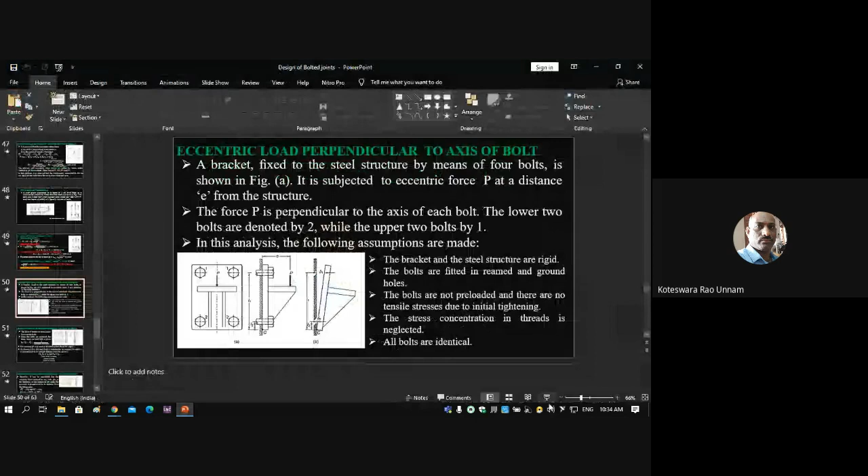In the previous class, we saw a bolted joint subjected to eccentric loading, which creates primary and secondary shear stresses. Today we see a bolted joint again subjected to eccentric load, but now that eccentric load will create a direct shear stress and a bending moment. So how do we analyze this type of loading? That's what we'll see now.

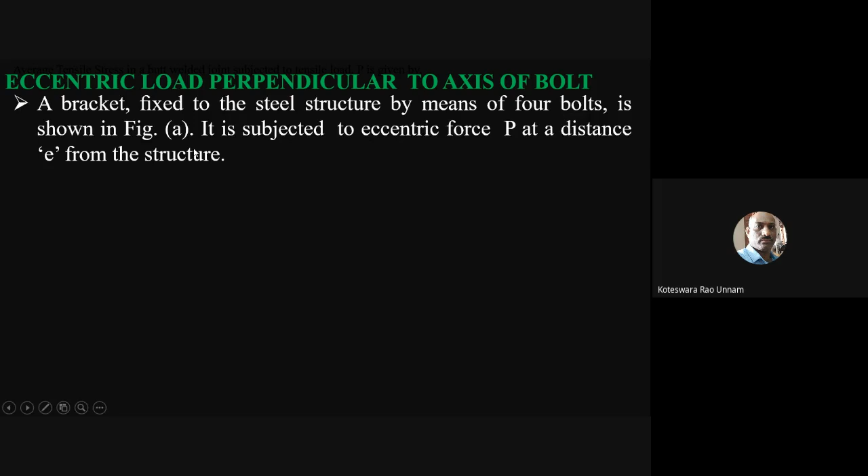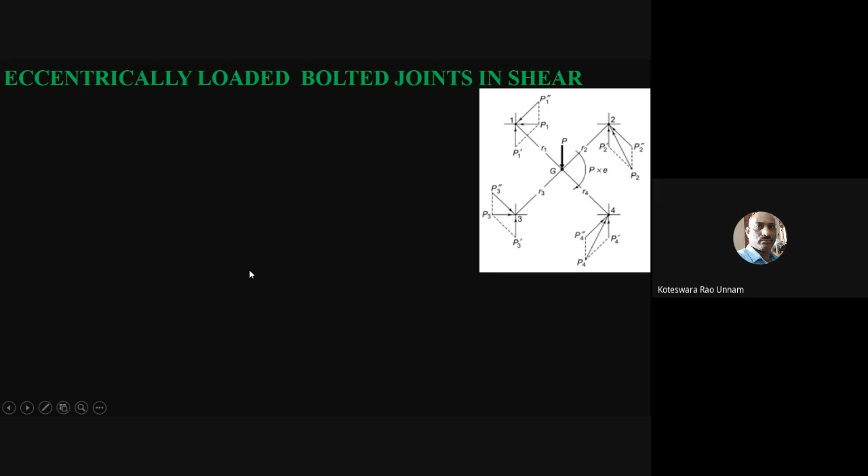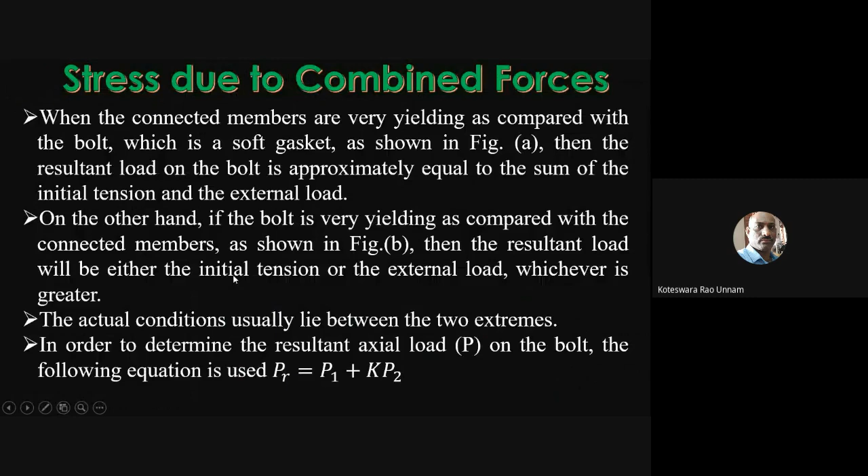Here I have a bracket. Notice the load is not in the plane of the bracket here, whereas earlier it was in the plane of the bracket. If you look at the numerical problems we discussed, taking this figure, here it is in the plane of the joint.

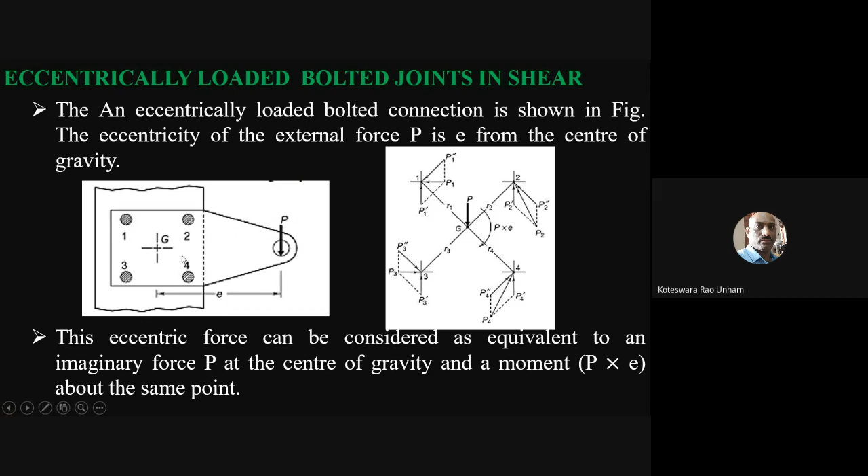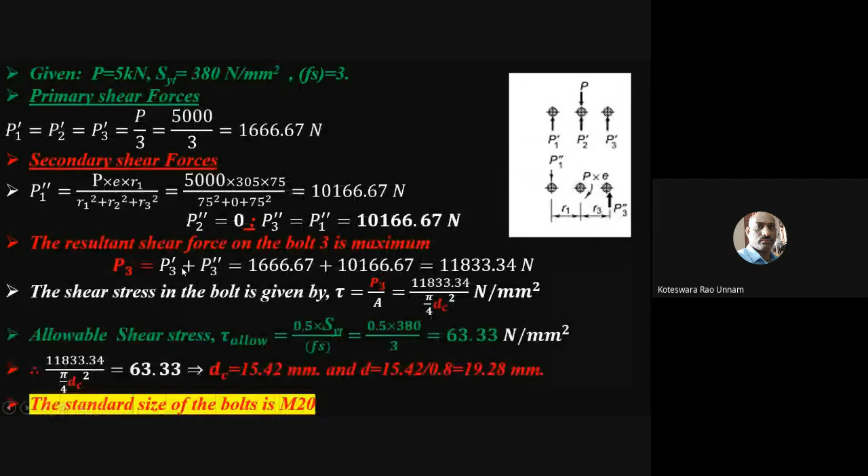Now it is perpendicular to the plane of the joint, or you can say the load is perpendicular to the bolt axis. Here this is the bolt axis, and this is the bolt axis, and the load is perpendicular to this axis. So that's what we mean by eccentric load perpendicular to the axis of the bolt.

If this kind of load is there, meaning the eccentric load is acting perpendicular to the axis of the bolt, how can we find its effect and do the analysis? For that, let us consider a bracket fixed to a steel structure by means of 4 bolts. In this example also, the number of bolts considered is 4. It is subjected to an eccentric force P at a distance E.

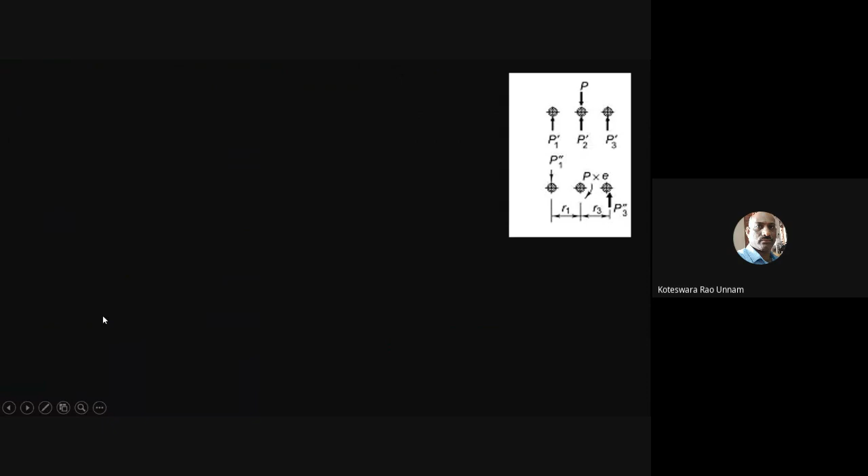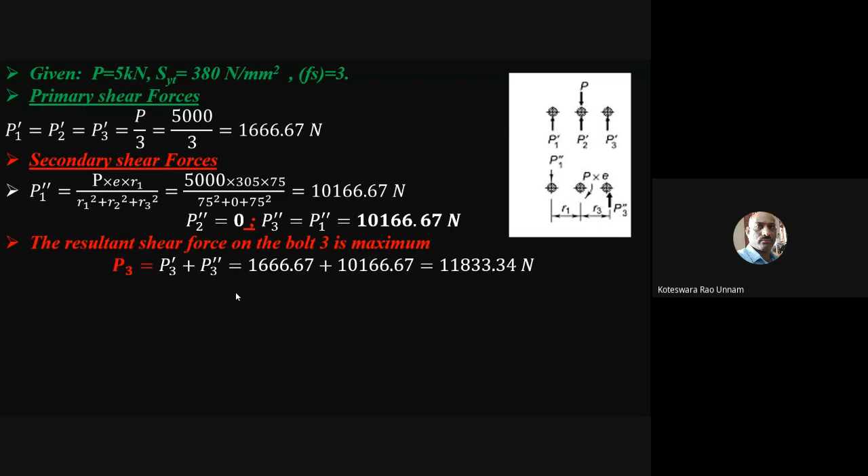Now the analysis here is completely different from earlier. Earlier we defined the eccentricity as the perpendicular distance between the load line and the center of gravity. If you look at the previous case, we get the center of gravity and take that as the eccentricity. But now it is not the case because the load is perpendicular to the axis of the bolt.

So here the eccentricity is defined from the plate, or the steel structure as he has said. It is measured from the steel structure to the point of load application, and that distance is taken as the eccentricity E. Also, while doing the analysis, we'll use different terminology here.

If this is the front view and this is the side view, in the front view you can see the load is acting somewhere like this, with 2 bolts on this side and 2 bolts on that side. Now, depending upon the effect of this force, we'll denote the bolts - these 2 bolts are denoted as 1, 1 and these 2 bolts are denoted as 2, 2.

Why is that? If you look at the side view and see the effect of this force P, because of this force, the bracket will try to tilt in this direction. Since it is fixed here by bolts, and you're applying a force here, this force will tend to tilt the bracket something like this.

So this is the tilted view you can see here - the bolt is tilted something like this. Provided the bolts are strong enough, it will remain safe; if the bolts are weak, it will tilt like this. So the amount of tilt, if this angle is theta, is constant, meaning the top bolts are elongated more.

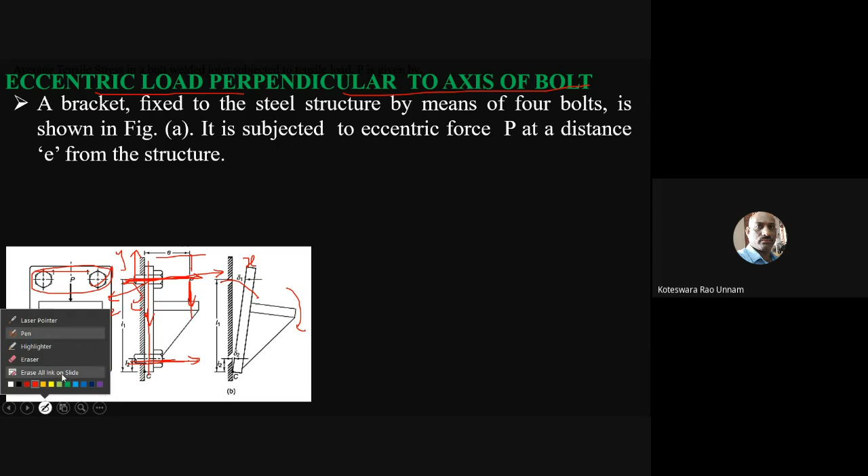So now you have to compute the magnitude of the shear stress and the magnitude of the bending stress. Then using any one of your static failure theories - either maximum shear stress theory or maximum principal stress theory - we'll try to compute the maximum principal stress or maximum shear stress based on the given data.

Suppose for this bracket or these bolts, if he has given the allowable shear stress, then we have to use maximum shear stress theory to compute the maximum shear stress in the bolts. Or in the problem, if he has given the allowable tensile stress, then you have to compute the maximum principal stress. So using the formula for maximum principal stress, you need to use bending stress as well as shear stress.

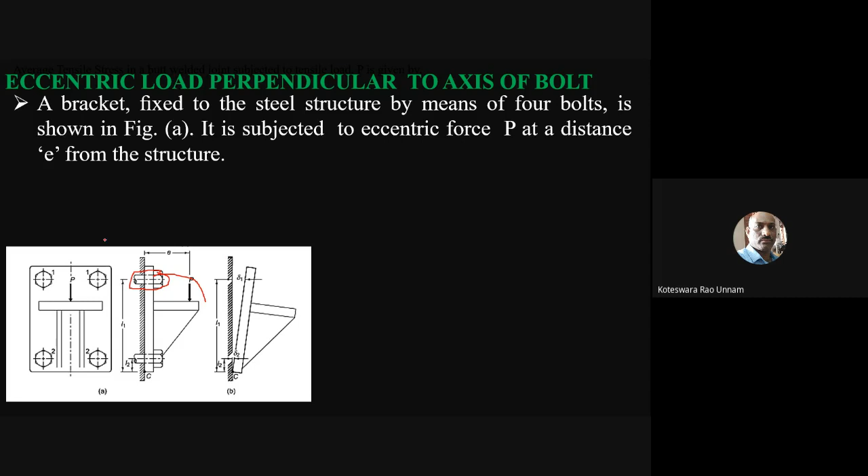So based on that, you can easily evaluate the diameter of the bolts required for the given application. So we'll see that now step by step.

The force P is perpendicular to the axis of each bolt. The lower two bolts are denoted by 2, while the upper two bolts are denoted by 1. That's what I said - so this is one set and this is another set. This set is denoted by 2 and this set is denoted by 1.

So how many number of bolts? Let us say sometimes there may be 3 bolts on the top and 3 bolts on the bottom also - we'll take all the 3 as one set on the top, and all the 3 on the bottom as one set. Then in this analysis, like in the previous case, we made some assumptions - the bolts are having uniform diameter and the secondary shear force is proportional to the distance from the bolt center to the center of gravity.

Here also we'll make some assumptions. Assumption one is that the bracket and steel structures are rigid - so this is the bracket and this is the structure, they are not going to deform. Only then is it possible. If they are also flexible members, then this delta will consist of a combination of deflection of the bracket as well as the bolt. So I don't know how to calculate the load taken by the bolt in that case.

We'll assume that the bracket and steel structures are rigid. That means there won't be any deformation in the bracket as well as the steel structure.

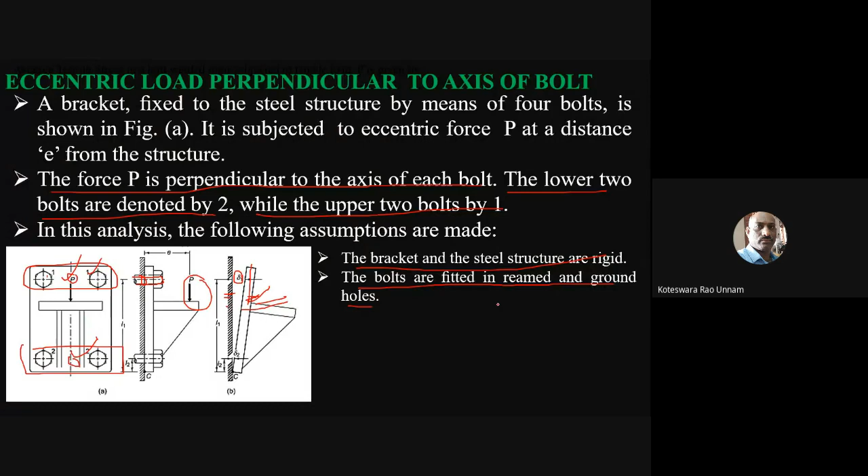The advantage of using this assumption is to neglect the stress concentration. When bolts and bolt holes are reamed and ground, you can ignore the stress concentration.

The bolts are not preloaded and there are no tensile stresses due to initial tightening. This is also one more assumption, that these bolts are not preloaded. So there is no preload on the bolts except this load. Before applying this load, there won't be any preload on these bolts. With that assumption, we can take that it is not going to create any tensile stresses because of that one.

The stress concentration in the threads is neglected. So with this assumption, you can neglect the stress concentration.

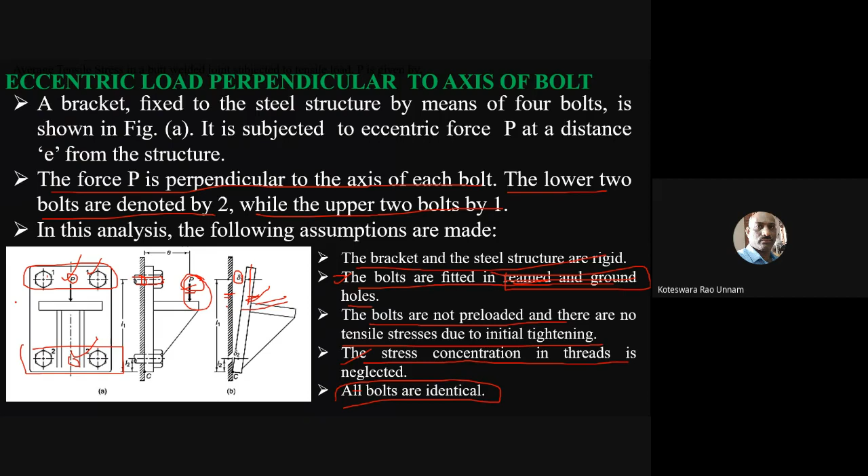The last assumption is all bolts are identical, in the sense all the bolts will have the same diameter. We already made that kind of assumption in the previous case also. Here also the same assumption.

Now we'll see the force P results in direct shear force on the bolts. Like already told, if I transfer that to the center of gravity of this bolt system, but here no need to calculate the center of gravity. Only thing is, if I transfer from this location to this location, then there is a direct shear stress on the bolts, and also that is direct shear force.

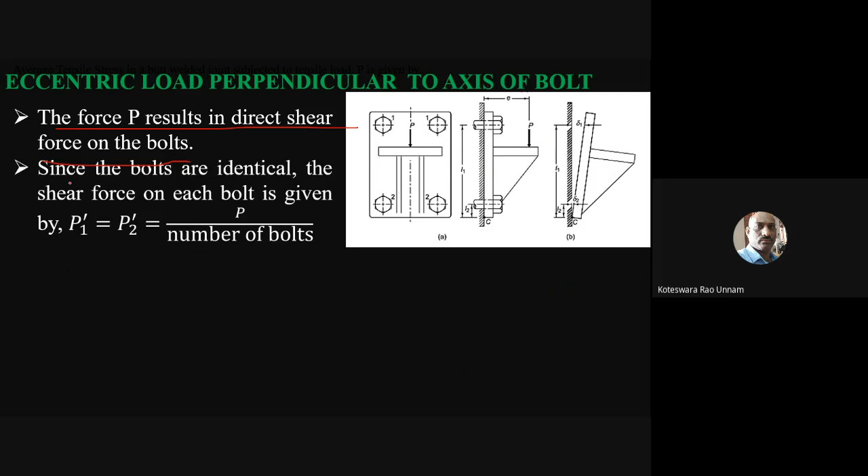Then you have a bending moment. Since the bolts are identical, the shear force on each bolt is given by P1 dash equals P2 dash equals P by number of bolts. So that means the direct shear force is same in all the bolts.

Like in the previous type of loading, here also the direct shear load is same in all the bolts. That is equal to the total load divided by, here you need to consider number of bolts, not number of sets of bolts. See here, I said 1, 1 and 2, 2. That means don't take here only number of bolts as 2, you have to take number of bolts as 4. Instead of 2 sets, you have to consider the total number of bolts.

That means the number of bolts in each set multiplied by number of sets. So here you have to consider 4, not 2. With that I'll get the direct shear force.

Once I get the direct shear force, then I can calculate the moment also. Moment is nothing but this P into E is going to be the moment. So that moment will give a bending stress, it will induce a bending stress in these bolts.

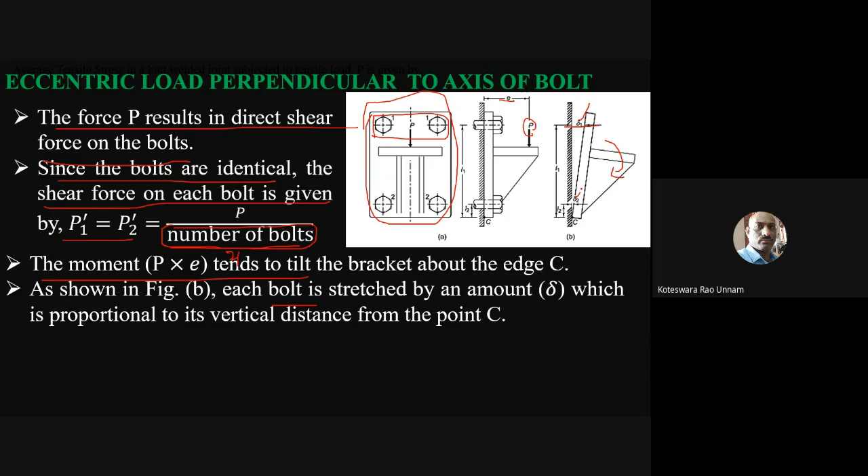As shown, each bolt is, because of this bending, the bracket will tilt like this, because we assume that the bracket is rigid. If we apply a moment to this, it will tilt like this. Because of that, the top bolts will be elongated by delta 1 and bottom bolts will be elongated by delta 2.

Each bolt is stretched by an amount delta which is proportional to its vertical distance from point C. You can clearly see that from the diagram. This L2 is the distance from the point of tilt, we'll call it C the tilting point or point of tilt. The bolt center line is here, so the distance between point C and the bolt center line of the second set we'll call L2. Similarly, the distance from point C to the center line of the first set of bolts is L1.

If this length is more, this elongation is more, as you can clearly see from the diagram. Here delta 2 is only this much, a very small quantity compared to delta 1. Delta 1 is large, because L1 is more than L2. So that's the condition: each bolt is stretched by an amount delta which is proportional to its vertical distance from point C. So if the distance from point C increases, delta is also more, and we know delta is nothing but the elongation.

We'll assume that these bolts are made of linear elastic material, so we can easily calculate what the stress is in them. So for that...

Our first condition here is delta is proportional to L. That means delta 1 is proportional to L1, delta 2 is proportional to L2, and so on.

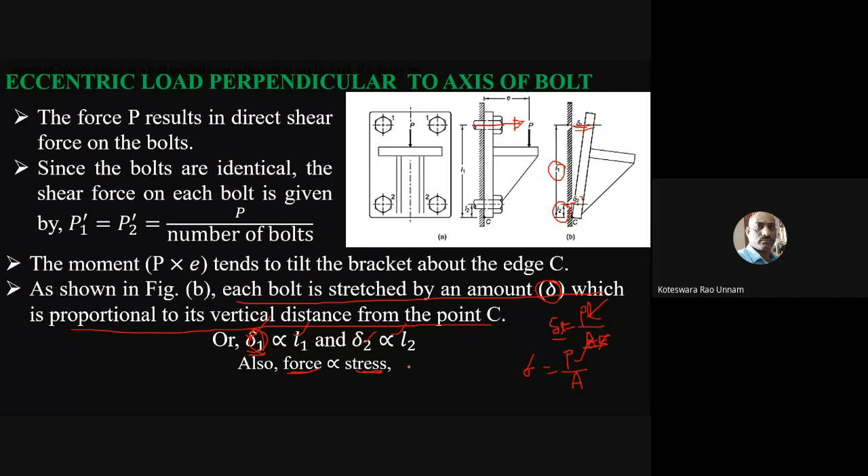So that means stress is proportional to force, or force is proportional to stress. Likewise, we can correlate delta to this stress value, since stress is proportional to strain also, from Hooke's law: stress is directly proportional to strain. So now what we'll do is relate these deltas to these force values. That's what we need to do, by taking all these conditions, to relate delta to the force values.

Similarly, strain is directly proportional to the stretch. Stretch is nothing but delta L, so strain epsilon equals delta L by L. If delta L increases, epsilon increases; if delta L decreases, epsilon decreases. So that's why strain is proportional to the stretch also.

So from all these conditions, it can be concluded that the resisting force induced in any bolt due to the tendency of the bracket to tilt under the moment is proportional to its distance from the tilting edge. So from all these relations: stretch is proportional to strain, strain is proportional to stress, stress is proportional to force. So removing the middle terms, force is proportional to strain, and force is proportional to stretch.

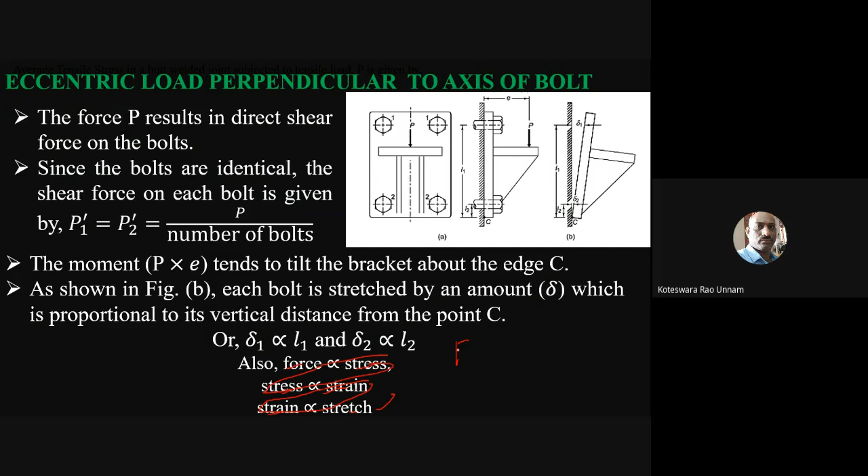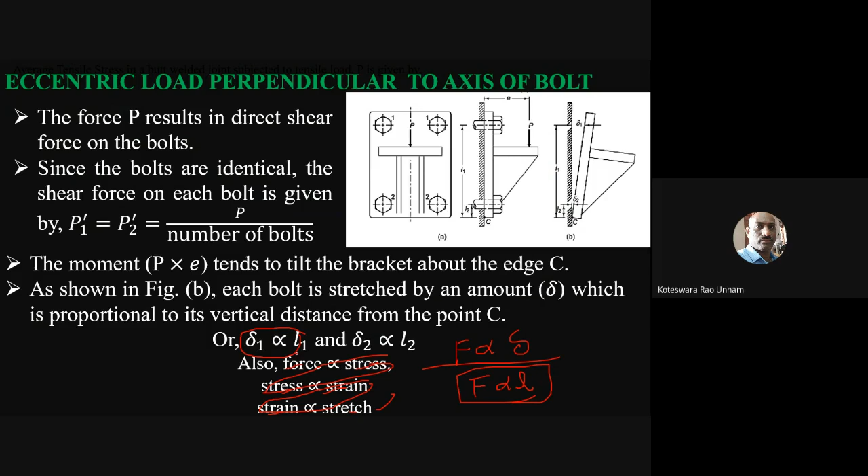That means F is proportional to delta. That's what we need to conclude. So here we said delta is proportional to L1, which means F is proportional to L. Finally, we arrive at this relation: F is proportional to L. So that's what we conclude from this statement: it can be concluded that the resisting force induced by any bolt due to the tendency of the bracket to tilt under the moment is proportional to its distance, measured in terms of L, from the tilting edge.

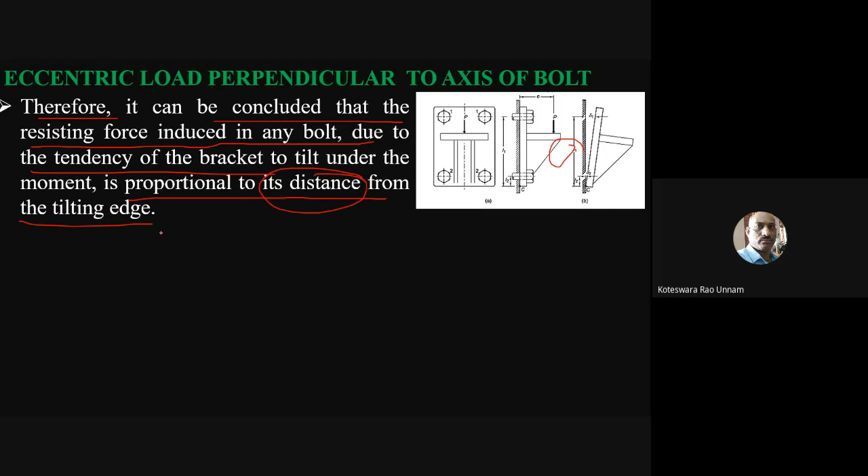So if I assume that, then again the same relation applies. The force due to this bending moment in the first set of bolts we take as P1 double dash, given by C times L1, where C is the proportionality constant, and P2 double dash is C times L2.

Now if you write the equilibrium equation, P into E is going to be the moment. One force acts here, P1 double dash, and another force acts here, P2 double dash. If you take moments about point C, then P into E, that distance we take as E, is going to be the moment due to the applied load.

This should equal load P2 double dash multiplied by distance L2, so P2 double dash into L2. Why use 2 here? Because in the given set I have 2 bolts, so I need to use 2. Similarly, the moment of P1 double dash is this force multiplied by the perpendicular distance L1, so P1 double dash into L1, and since this set also has 2 bolts, I need to use 2 here too.

So therefore, these are our equilibrium equations. If you substitute P1 double dash as CL1 and P2 double dash as CL2 into this, you can calculate what C is. Once you know the C value, you can calculate P1 double dash and P2 double dash also.

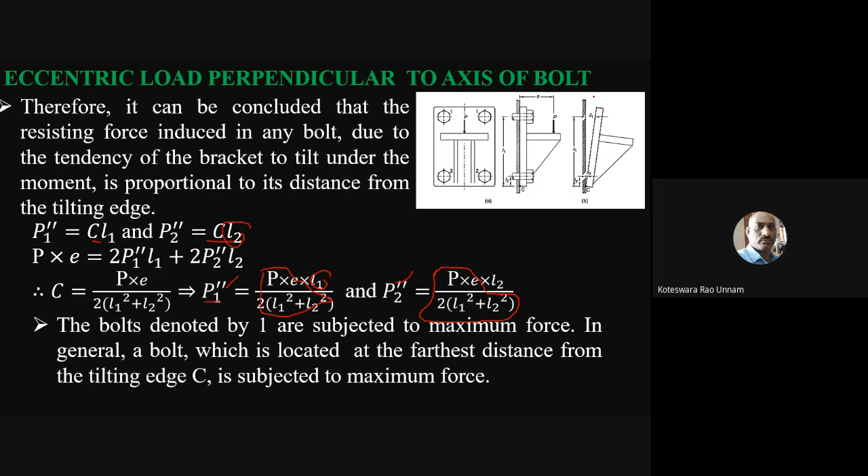That is nothing but your C, giving CL1 and CL2. Since C is same for both, if L1 is more than L2, then obviously P1 double dash is going to be more than P2 double dash. That's why L1 is more than L2, so the bolts denoted by 1 are subjected to the maximum force, because L1 is more compared to L2.

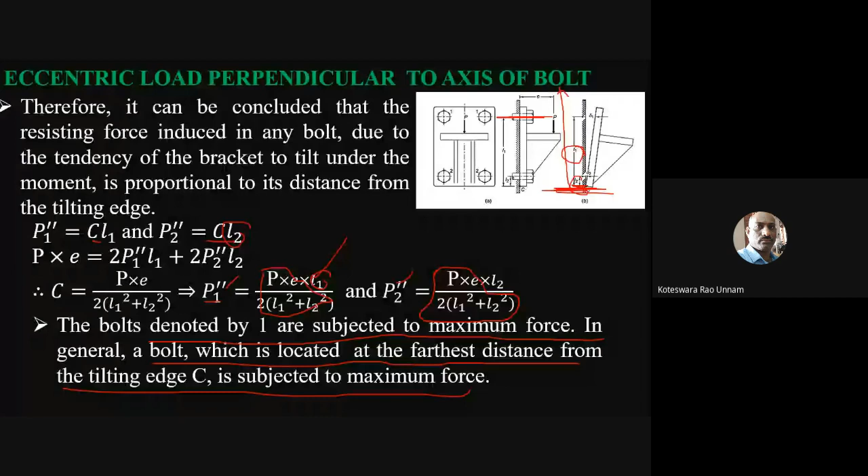So in general, the bolt which is located at the farthest distance from the tilting edge is subjected to maximum force. We can generalize that statement: whatever bolt is farthest from this tilting point is subjected to the maximum force. Here, bolt set 1 is farthest from this tilting point, therefore P1 double dash is going to be the maximum.

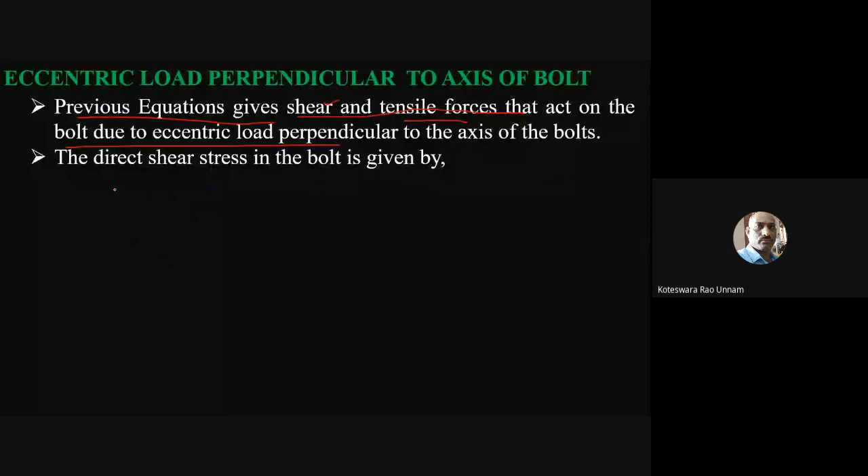Once you have P1 double dash and P1 dash, you get two stresses. The previous equations give you shear and tensile forces. One is the direct shear force, the other is the tensile force due to bending moment. These two act as the effect of the eccentric load, so you can compute the shear stress and the bending or tensile stress, which is due to bending moment only.

So therefore the direct shear stress is given by P1 dash by A, where A is pi by 4 into dc square, dc being the core diameter of the bolt. This is the direct shear stress.

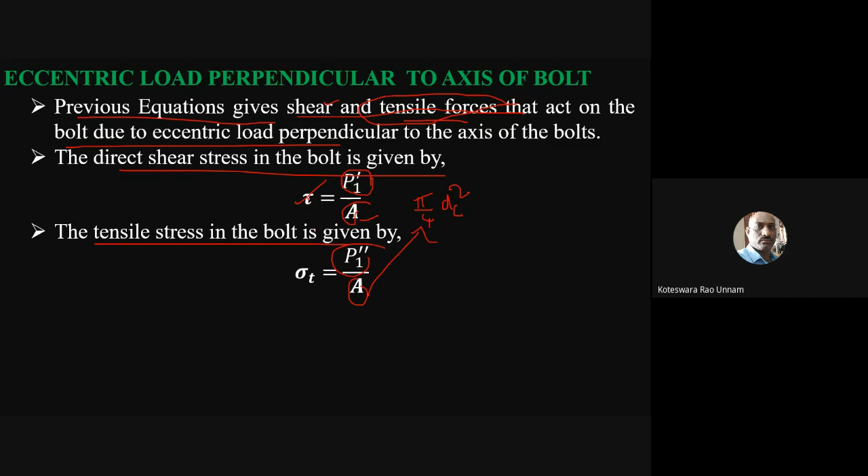Similarly, the tensile stress is P1 double dash by A, again using the same formula, pi by 4 into dt square. So now I have one shear stress and one normal stress: this is the tensile stress, this is the shear stress.

Given normal stress and shear stress, I'll use failure theories to find either the maximum shear stress or maximum principal stress, where A is the cross-section area of the bolt at the minor or core diameter. So you need to use this formula.

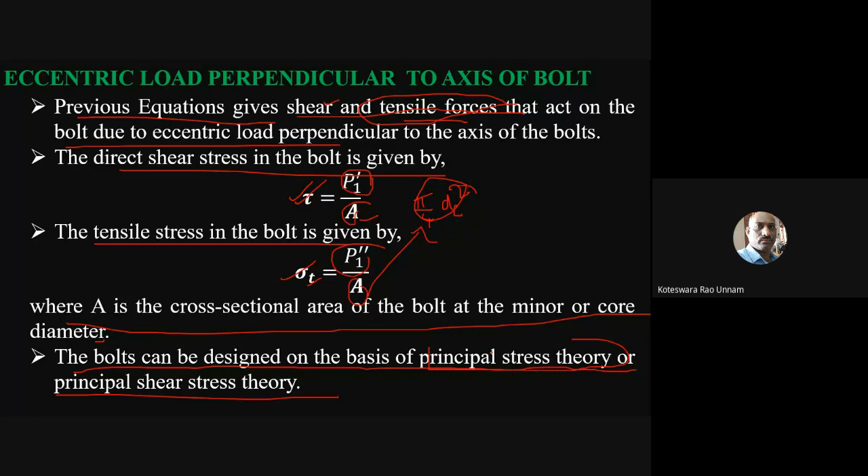The bolts can be designed on the basis of principal stress theory or principal shear stress theory. As already told, the bolt can be designed either based on maximum principal stress theory or maximum shear stress theory. If I want to use principal stress theory, I need to compute sigma 1, given by this relation.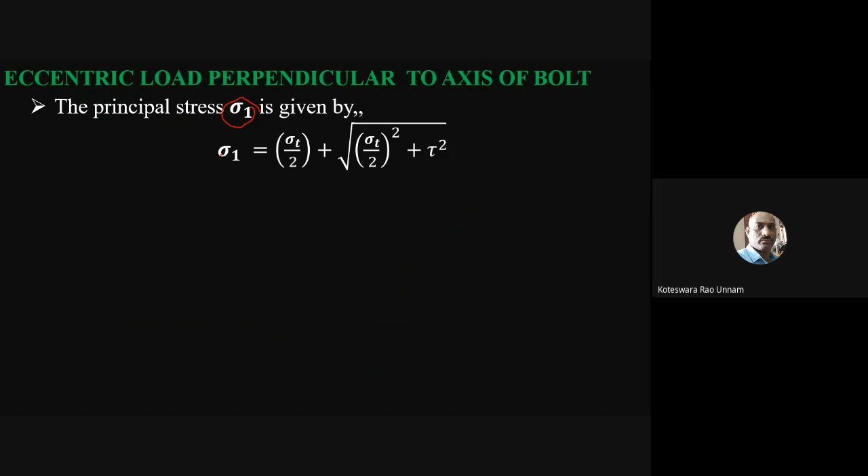So you have a tensile stress and a shear stress. We know the formula for sigma 1: sigma t by 2 plus square root of sigma t by 2 whole square plus tau square. Using this formula, I'll get the maximum tensile stress.

Then for failure criteria or design criteria, I need to equate this to SYT, the yield strength in tension divided by factor of safety. This will give you the allowable stress, sigma allowable. Using this, you can calculate the diameter of the bolt, if you want to use maximum principal stress theory.

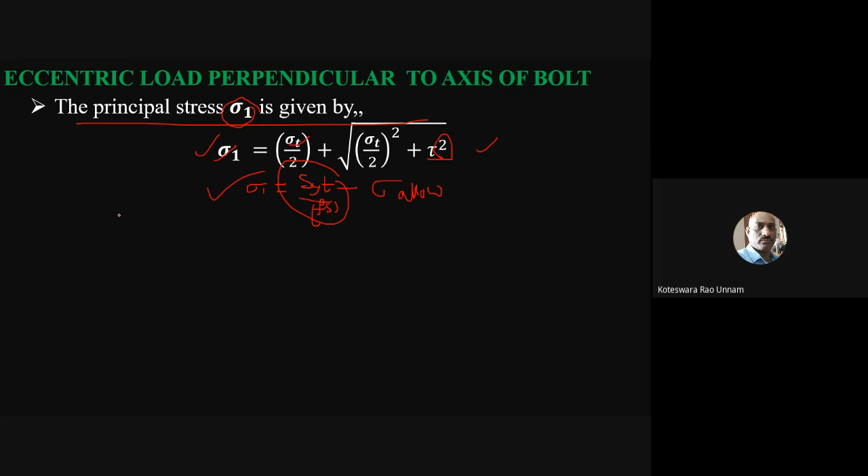But if I want to use maximum shear stress theory, I first need to calculate the maximum shear stress. Tau max is the expression for the maximum shear stress: square root of sigma t by 2 whole square plus tau square.

So from this I can calculate and get tau max. Then for the design criteria, you need to take tau max, which is nothing but SYS, yield strength in shear, divided by factor of safety. This we will call allowable shear stress, tau allowable.

Using this relation, either this relation or this relation, based on the data available to you, you can use any one of these two relations, and you can design the bolt system.

But in most cases, we'll assume that the bolt material is ductile. You have to use this maximum shear stress theory compared to the principal stress theory, because the principal stress theory gives better results for brittle materials, not ductile materials. So we'll assume the bolt material is ductile, and in most cases we need to use this theory. This theory is recommended.

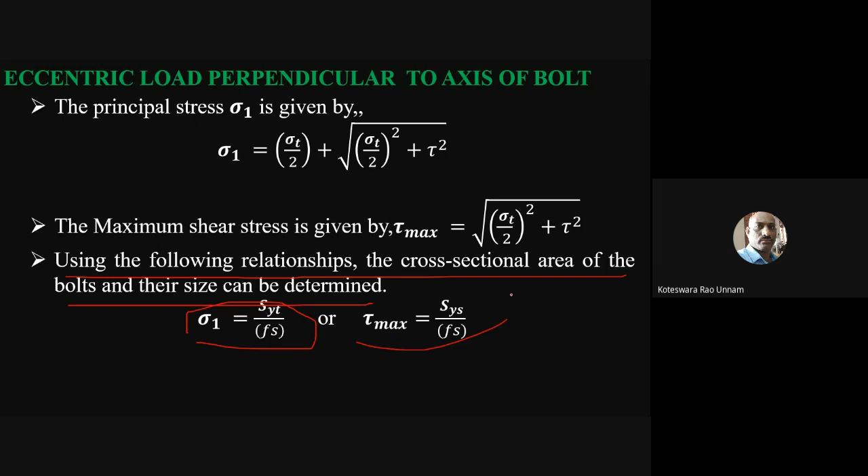So for the bolted joint, you have to use this formula to determine the diameter of the bolts. This is how you can analyze it. Using the following relationship, the cross-sectional area of the bolts and their size can be determined. Sigma 1 is nothing but SYT by Fs, or tau max is SYS by Fs. The bolt material is usually ductile, therefore it is appropriate to use maximum shear stress theory of failure, as already told to you.

So this is how you can do the analysis when the eccentric load is perpendicular to the bolt axis.

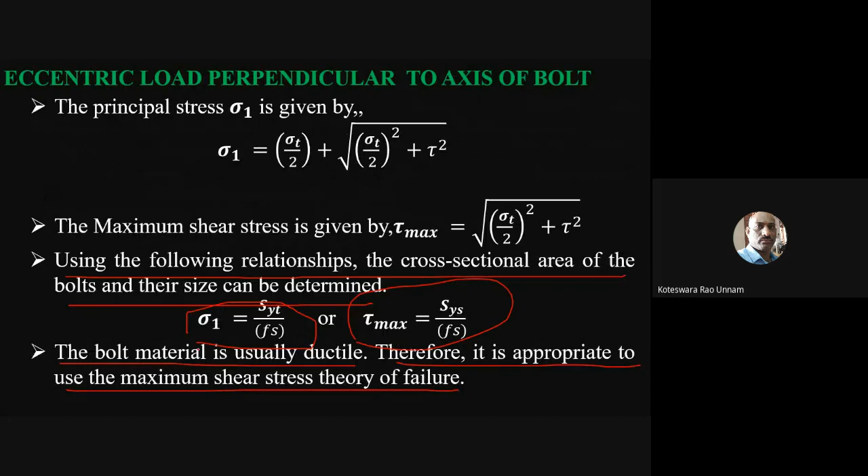So now we'll take up one more numerical problem on this also, and try to close this topic. Before going to discuss the solution for this problem, I'll give some time to you. Just note it down, 2 minutes. Within 2 minutes, note it down, then we can proceed for the solution. Okay, so now note it down, once it is done just inform me.

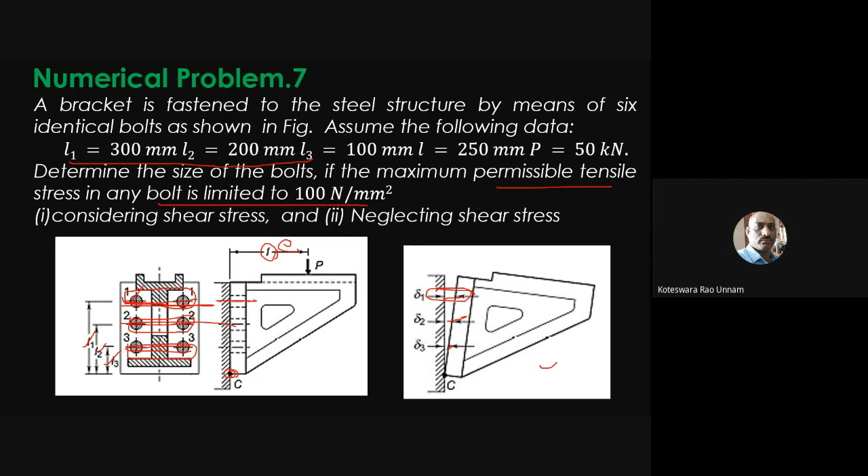So you can clearly see that if it is in tilted position, this is the free body diagram. You can see that delta 1 is more compared to delta 2 and delta 3, so therefore this first set of bolts will be subjected to maximum tensile load. From this you can understand that point. Right, so now direct shear stress, given load is P.

Direct shear stress is nothing but P by number of bolts. Here you have a total number of bolts as 6, load is 50 kilonewtons. 50,000 divided by 6 comes out as 8,333, which is going to be the load on each bolt.

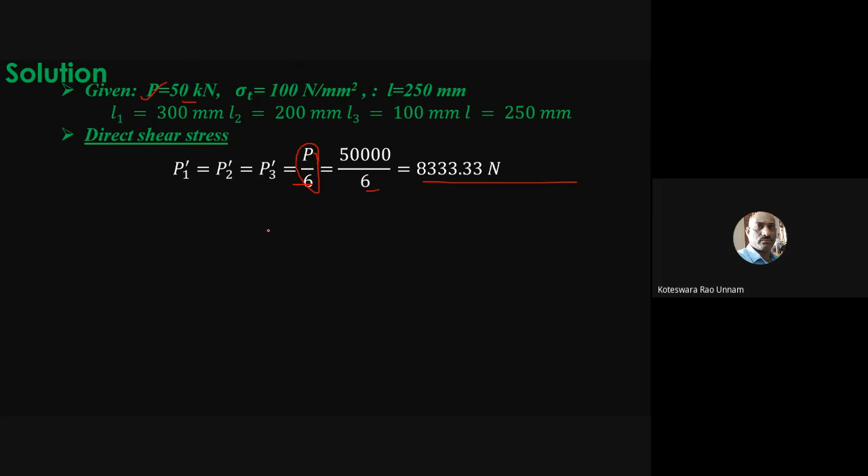So this is going to be the direct shear load. Then the direct shear stress is nothing but load divided by area, so P1 dash by A. We'll keep A as A itself, and later we'll find out what is the value.

Similarly, maximum tensile stress formula is this one: P1 double dash is P into L into L1 by 2 into L1 square plus L2 square plus L3 square. So here you have to calculate L1, L2, L3. Why? Because earlier while discussing the theoretical concept we considered only L1 square or L2 square, since there you had two sets only. Now here you have three sets, so you have to take it like this.

So if you substitute the given data, L1, L2, L3, we get P1 double dash as 13,392.75 newtons. Then our sigma T is P1 double dash by A, so P1 double dash is 13,392.75. Once you got all those values, this is the formula to compute sigma 1.

Sigma 1 is nothing but sigma T by 2 plus square root of sigma T by 2 whole square plus tau square. We calculated sigma T and tau values, and if you substitute that, this is going to be your sigma 1.

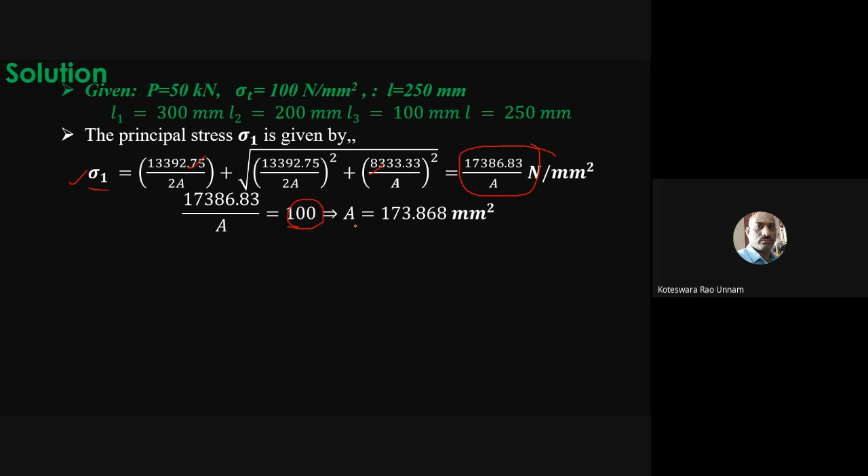So now we need to equate sigma 1 to the allowable tensile stress, that is 100. From that you will get area as 173.86 mm square. Now you can refer your data book. One way of doing that is to refer your data book and look at what is the area.

So from the data book you can easily identify that for M18 the area is more than 173, or close to 173. Open your data book chapter number 8, you can see that. So what is the area of each bolt, for a given diameter M18? How did I select M18? If I take table number 8.7, the first column is basic diameter or nominal diameter, and the last column is tensile stress area.

We calculated that the tensile stress area required is 173.86. Now if I go for M16, the tensile stress area is only 157, but here we require 173. So if I choose M18, a bolt with nominal diameter 18 mm, the tensile stress area is 192. Therefore this is the diameter of the bolt we need to choose.

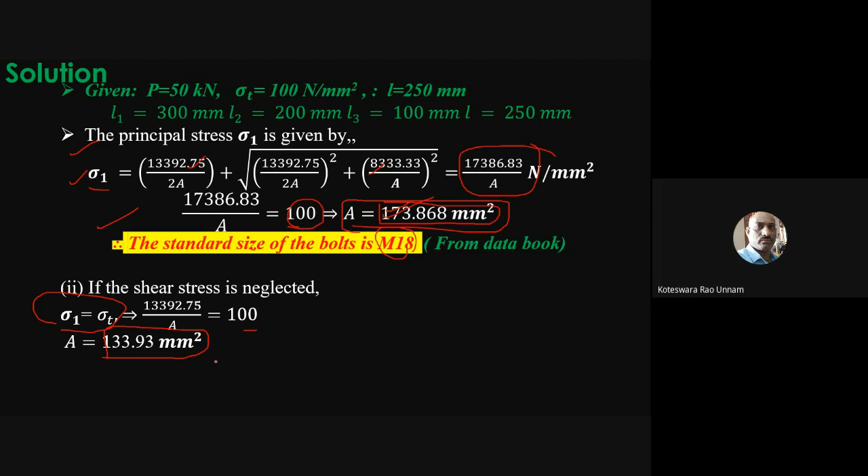If you do that, we get area as 133.93 mm square. Then for that, M16 bolt is sufficient. So for 173.868 you have to choose M18, and for 133.93 you have to choose only M16 bolt. This is how you can solve the problem.